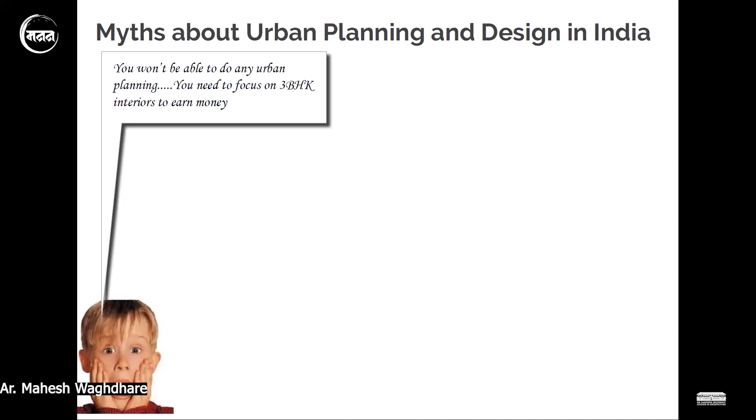Some of these myths started coming about immediately when we started formulating ourselves and figuring out how we would do urban planning. There were comments given to us like, you need to focus on 3 BHK interiors - that's how you'll earn money. You'll start off with 1 or 2 BHK interiors to at least get some money rolling. What is planning and urban design in India? It's like, when you grow and become something big, that's when you start it.

And then obviously I think I went through this the most. Sarfaraz and Mahesh were already married with kids, and I was already 30, and everybody was like, 'Don't start your business right now. Start it after you get married. Don't find business partners first, find a life partner first.' There was a lot of noise in our background when we were starting this. But our focus was always that we have nothing to lose, so why not start an urban design practice? We had to fight through a lot of this noise.

And then obviously when we do urban planning, there are a lot of big architects and names - a lot of credit to them - but how do you start if you want to do large scale planning? If you're not an established architect and don't have any connections, how will you start any kind of planning and urban design? People said there's no hope for you guys, you can't even get going. And obviously, you don't have any project experience under the firm's name. We had our individual resumes built over years, but you need to do some pro bono projects to build a portfolio.

We started off StudioPOD, and the first thing, fortunately, somehow we got a client who was looking at a particular site in Gurgaon, which was a very big master planning exercise for more than 1,000 acres. He was working with the government and wanted to put together a pitch he could show them. He had some wild ideas — why don't you put a golf course or some kind of high-end housing and an overall amazing master plan, and when can this be ready? We were very enthusiastic, a bunch of starters, and said we'll get this going tomorrow itself.

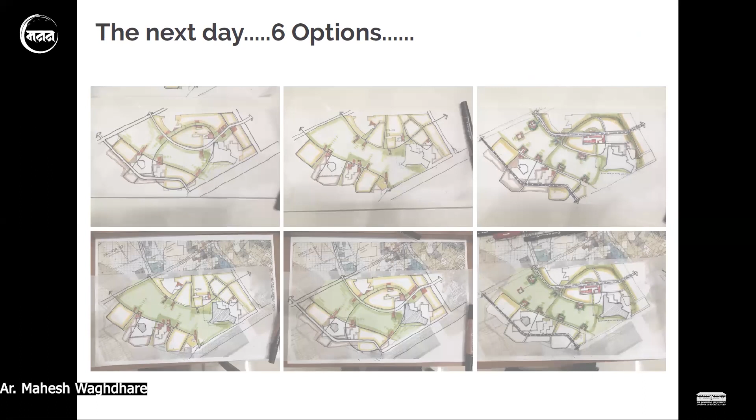So we went back to the drawing board, did our quick optioneering, and came back with these amazing sketches. We thought, oh wow, this is really cool, right? Then the client saw this and said, oh, this won't work here — this is very Western for us. We can't just come in and show these things and get these ideas. How would you kind of do that, right?

So we stepped back and thought amongst ourselves that we need to really not skip the process in the whole eagerness of doing these projects. We have to decipher our way of doing things, the Indian way of doing things. We have to look at whatever learnings we have and show that process. You cannot avoid that process and directly jump to the final thing — you have to show the process to the client also, whoever you're talking to.

It's not like a very highly technical thing — it's about taking them on board with communication of how you do these things. And again, using the knowledge over whatever 7, 8, or 10 years of experience we've had, it's about how well you communicate, whether oral or graphic, your ideas to whoever you're explaining to.

So this is what we really understood in the beginning itself — that you need to look at relevant solutions from our perspective, our context. We cannot go and jump to something where anybody would say, oh, this is not coming from the ground, from the context itself. We always find this very fascinating.

This is an award-winning NID product by Vikram Panchal, which is basically something as simple as what a construction worker would use to carry bricks and construction stuff around. How could you simplify something as simple as this and put it in context for anything you do in terms of design and planning.

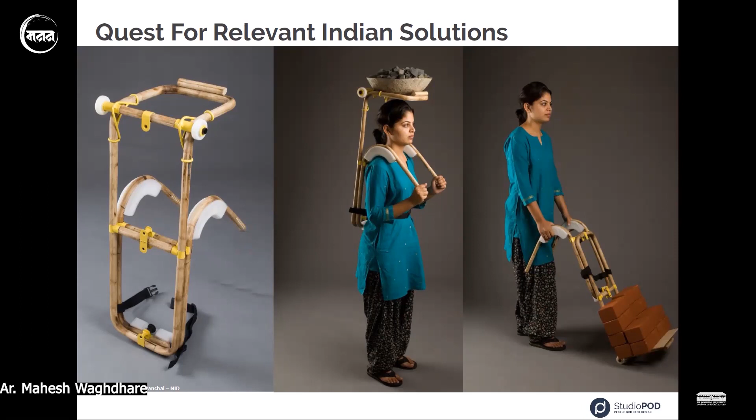So we retreated and went back amongst ourselves and said that we'll follow the process, let's not jump it. We have to look at the overall thing, whatever the project scale is, big or small. We have to plan for resiliency into our projects, for sustainability in the longer term — whether it's environmental, ecological, or economical, all of those parts. We have to plan for resiliency.

Connect efficiency is about transportation, infrastructure, and human scale, which is very important when we look at these large-scale projects, and even in architecture projects. We always get lost in the design idea of what a building is, but then what does human scale really mean? And when you do large plans, you have to phase out and invest at the right time, at the right place, and in the right part of the project.

At the end of it, all of it has to be done together with larger teams. Even in architecture projects, we have not only the architecture designer, but an array of consultants, technical experts, and structural engineers to come up with the whole idea and execute it. At the planning level, it becomes much bigger — you have stakeholders who are not in the discipline, you have to talk to politicians, you have to talk to all kinds of people to come up with a particular strategy that would work.

So we went back and just reiterated some of these. And what we'll show right now is some of the work we are doing and the learnings from each of these that we are looking at.

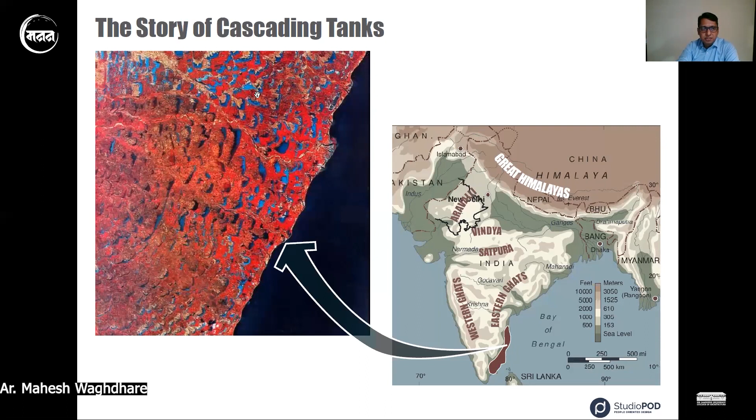This is basically the eastern part of India, towards the Bay of Bengal, the Eastern Ghats going towards the Bay of Bengal. This is Tamil Nadu and larger South India as such. There are more than 300,000 tanks connecting each other towards the Bay of Bengal. We obviously have all these river systems connecting to the Bay of Bengal in this part, and all of these tanks were man-made, some dating back to 300 BC.

It was a very interesting, intricate network of water bodies that used to connect to each other and over a period of time connect to the river itself. The idea was when the monsoons happen, the rivers are not all perennial - they have water at that time, but they give water to these tanks, and this is where the storage system used to be built up.

It was very well managed - 2 to 3 villages used to manage one particular tank, and everything was quite decentralized. So the entire water utilization and taking care of the water was very decentralized. Everybody used to take care of the water bodies for drinking purposes, for farming, and everything else - two different tanks were used. It was a very sustainable, self-contained system.

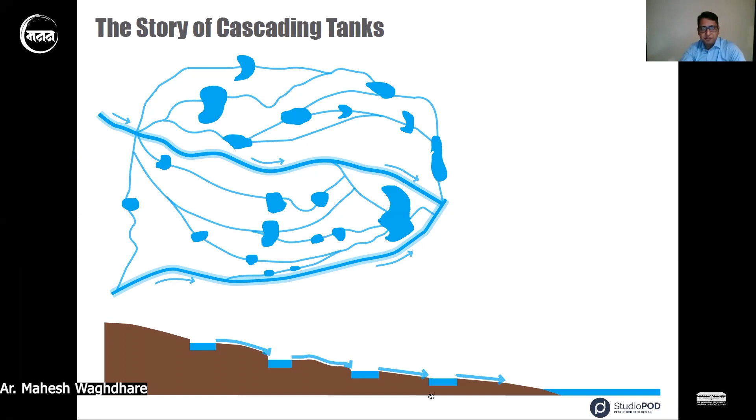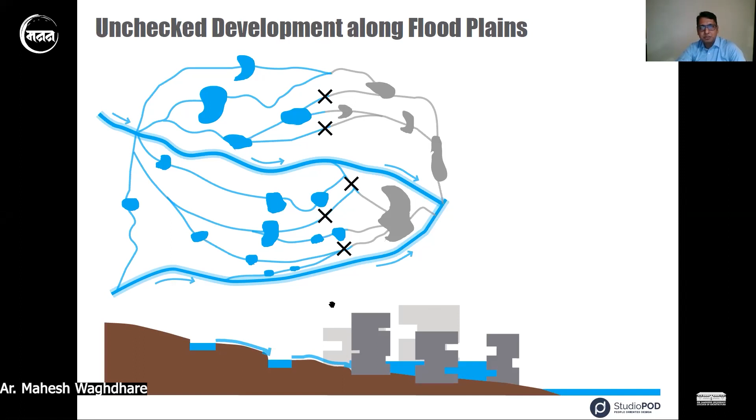There was a lot of loss of life and businesses and all kinds of big impact. It was a very big realization that we are having recently.

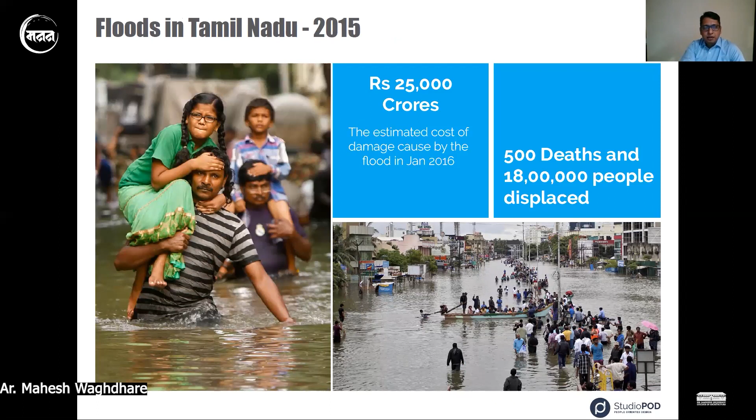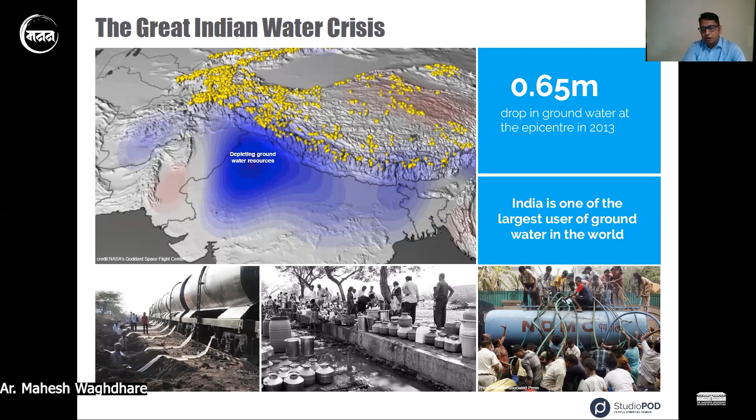So there are 2 different polarizing conditions of how water is creating havoc in some places, while at other places there's no water. So in terms of when we're using this kind of information, how do we look at it when we have large-scale projects in planning?

This is one of the projects we're working on currently in Pune - a large township development in Kharadi. This circle marks the site. But when we look at this whole development, it's a larger ecosystem which is prevailing, which is again part of the whole ravine ecological system - the water bodies, the greens, how the entire connection at a larger scale is happening to this particular place.

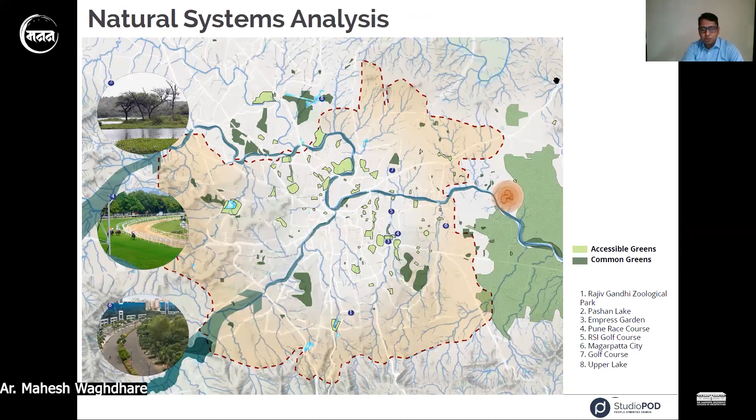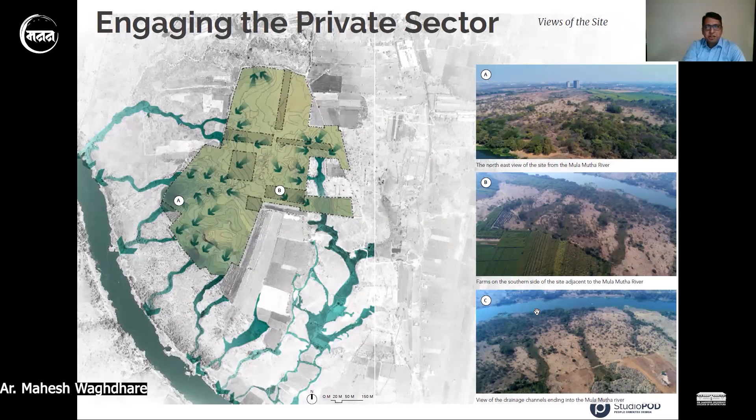When we looked at it much more carefully, we could see that the entire topography was well established, and towards the river these small little ravines and rivulets formed on the side, shaping the topography and reaching the river itself. Amazing views if you see these aerial drones, these green paths leading to the river. So when we did the whole master plan, we made sure these rivers and ravine areas, these small streams, were maintained and enhanced on site itself. And if you look at any master plan, the open spaces are always central to the whole plan.

We made a plan that was ecologically resilient, with an open-ended plan where development was not central to the open space. It was more towards the river on both sides, with development going around it. So we created a whole heart of a complex, but the open spaces always respected the current topography and ecology of the site.

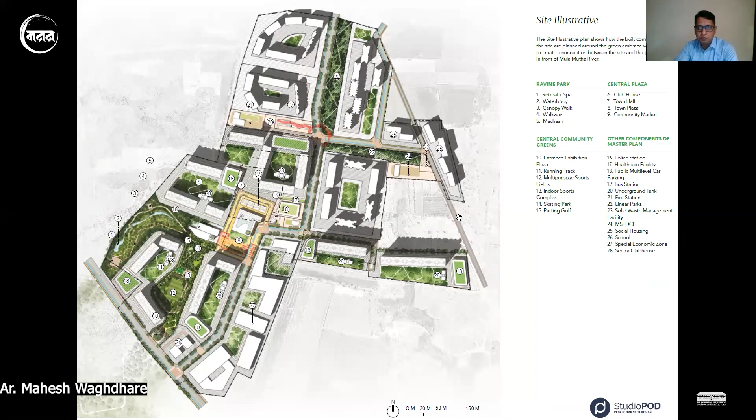Then there are the layers of storm water, treated water, how grey water is reused on site, and the strategy of water collection. We've been doing this over the years, as in India there was a sensitivity towards water and the culture of water itself. But we need to respect the current topography and look at water strategies accordingly.

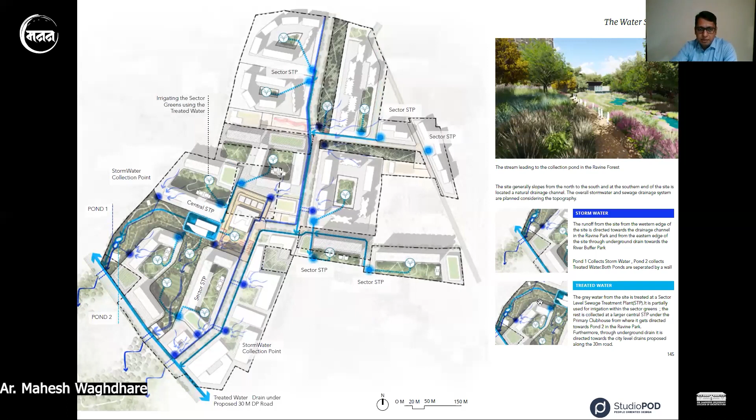So this is one of the projects with a very different approach. We're also doing the whole landscape in this ravine system, implementing this entire large landscape right now. The idea was retaining the ravine system, allowing the streamlets to flow through it, with a nice canopy walk that respects nature. It's not over the board in terms of ornamental landscape, but really looking at the ecological part of the landscape itself.

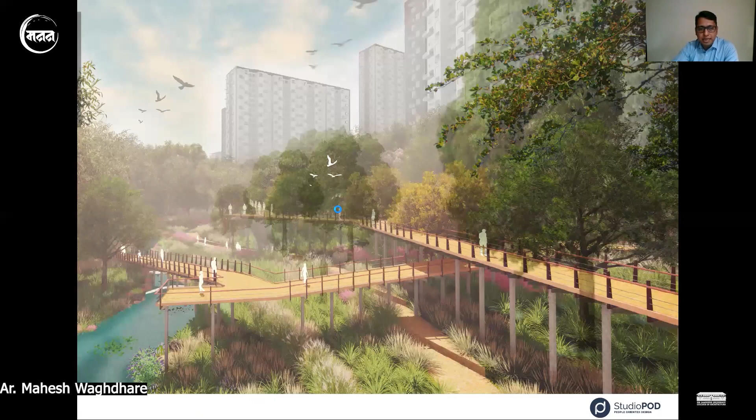This is under construction right now, and the idea was to create this whole 10 acres of self-sustaining forest within a private development, which is a larger township, a public-private kind of thing. So something which is evolving as a project itself.

At the same time, we're also working in other areas, and this is in Abu Dhabi, where we worked with CBT architects. It was an international competition we won against AECOM and very large companies like Surbana and others. The idea was to create a water story for a totally different context, hot and humid climate in Abu Dhabi. A larger part of it is desert itself, and how sea level rise impacts it, and how you look at the entire edge condition of the water.

This is almost like a 10,000 acre island, which is a third of the city of Abu Dhabi itself. The entire strategy was to look at it from an ecological perspective, how you look at the edge from a resiliency perspective for sea level rise of 1 to 3 meters in the future, and create a whole system that allows water to come in and out of the site.

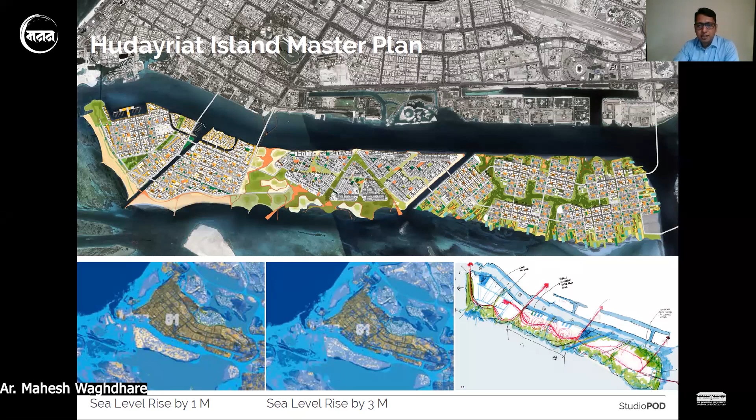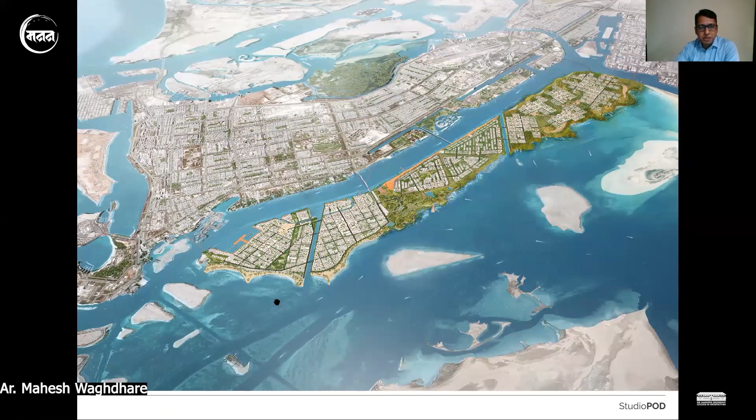The competition winning entry has reached a different stage now. A part of this island is already opened up for citizens, and Abu Dhabi is a different world altogether in terms of the pace of a project. So the idea is that a lot of these systems, you have to think differently. It cannot be a copy-paste solution that works in one context and is just applied in another. We work in different contexts where different things happen, and you have to adapt to it.

One major chunk of this was also this large open space. This team had a very big consortium of 8 to 9 specialist consultants. One was a transportation consultant who talked with us about how to position the open space. He suggested that instead of having it on the northern side of the island as originally planned, we move it closer to a particular access point, which would become a larger city amenity itself. So the idea is that ideas coming from different places merge together and become one thing.

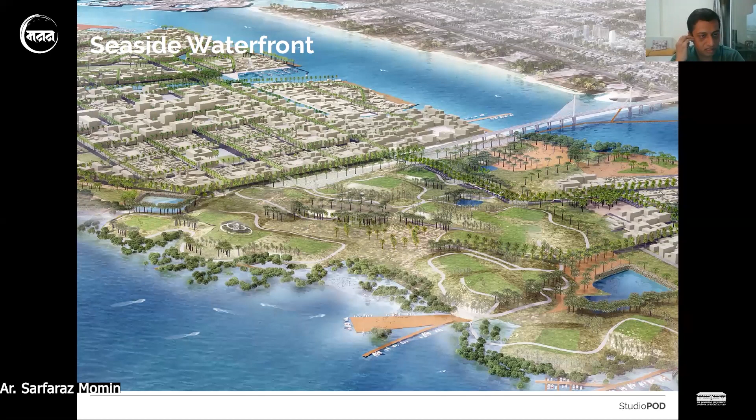So we have to come up with different strategies depending on what the context is, right? Similarly, one of the biggest mantras that we stick by, a very important mantra for us, is connect efficiently.

So we always show this picture. This is how we discovered that we can communicate with a lot of clients in India when we talk about history, what used to be there, what was good about it, and how we can adapt that and make it more 21st century. We show them this picture of Chandni Chowk, where you had room for everyone - Hathi, Ghoda, Palki, people, everyone had room on our streets.

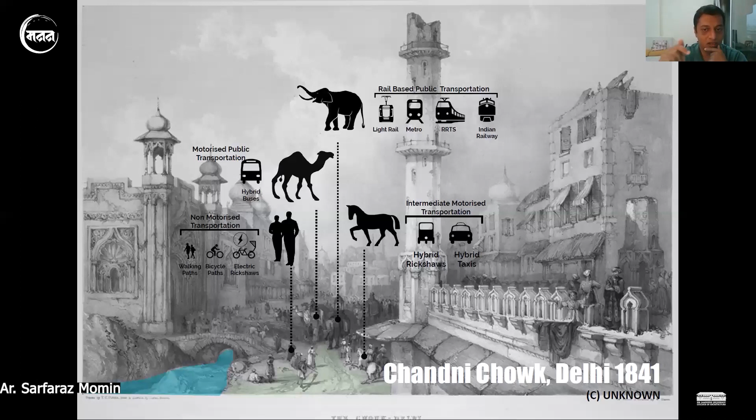If you were to design streets like this in the 21st century, you will have to create room for all the different modes that are available. However, unfortunately, currently our cities are only building for one mode of transportation, which is the car. And that has to change, because this is not a sustainable mode at all. If we grow at the pace we are growing, we'll have to increase our road capacity almost 6 times to accommodate these cars on our existing roads.

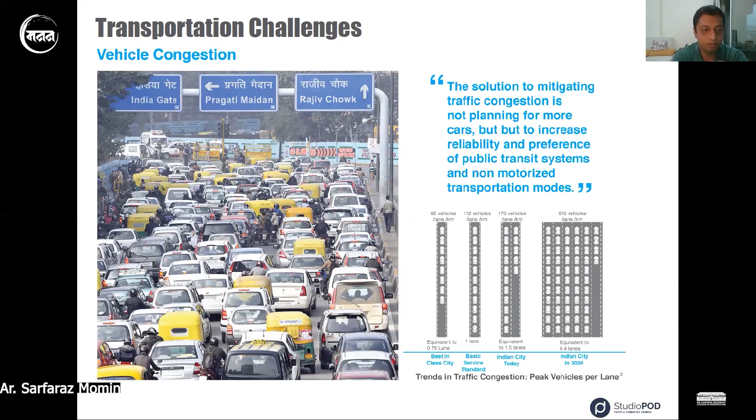And it's not going to stop there - demand is always going to increase. There are no cities in the world that can actually provide enough road for cars. There will always be problems that arise.

So the biggest mantra is to change the whole paradigm. The paradigm is that we design cities for people, not for cars, where people come first. You want to move people, not move cars. And then you deprioritize other areas, and make sure everyone has room on our streets.

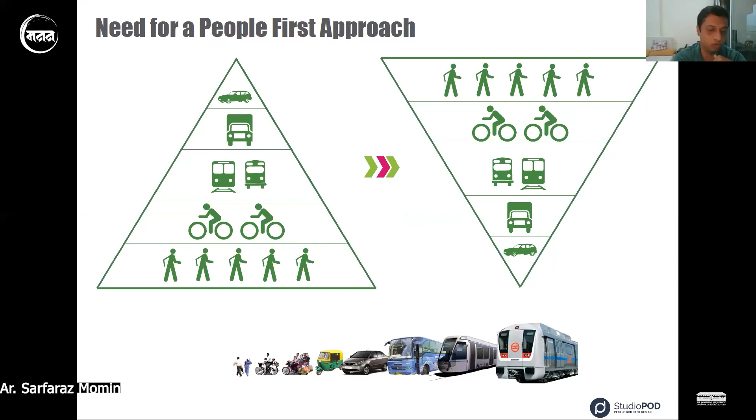So what we do, as shown on the top left-hand side, is we demonstrated this on one of the wide streets in Gurgaon. It's like free for all - there is absolutely no room. It's like putting a little goat and a tiger in the same cage - who do you think will win, right? So in this case, the cars are the dominant species who will dominate the entire area if you give them that space.

What we need to do is create safe spaces for all different modes to exist. Hathi, Ghoda, Palki - how will we get them back on our street? We have to make room for people to walk, cycle, vend on our sites, have public transportation, ensure equal access to all sorts of people, and make room for all of them on our streets. So this was a version of a 60-meter right-of-way - a 60-meter right-of-way available in Gurgaon, shown on the top left side, converted into this. We have room for open spaces, trees, birds, room for everyone on these streets.

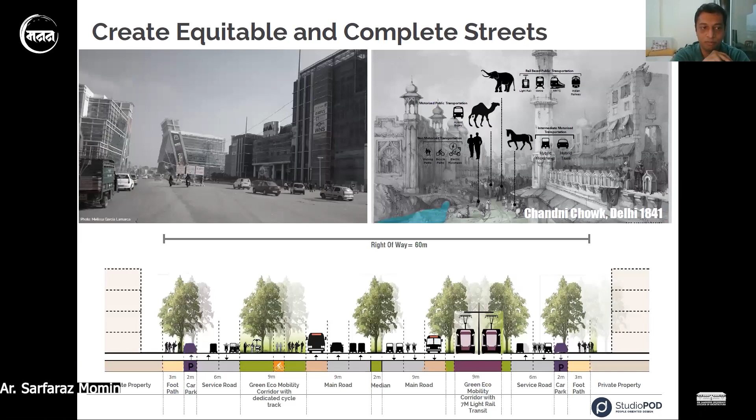And streets suddenly then become public spaces, correct? That's the idea - one of the biggest assets we can have is to convert our streets from being just transport corridors to also being public spaces.

And the one mode that they could think of was cars. So they said, oh, we need to increase the capacity of our roads - that's it. They came with this agenda that we want to build a highway all along Dal Lake.

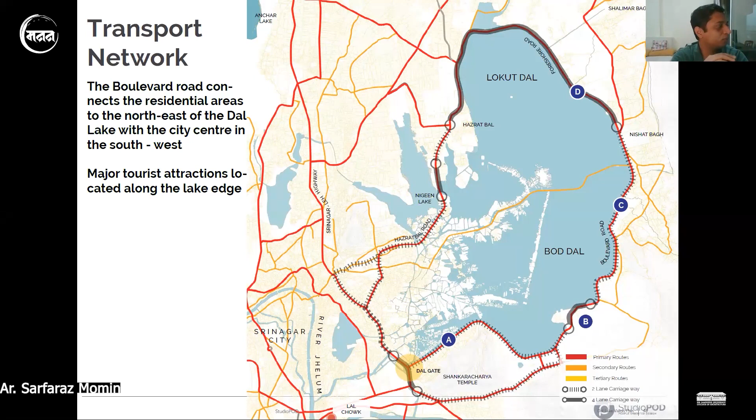So what we had to do is go back to the drawing board and understand what the problem was.

So what we wanted to do is connect Nishat, Shalimar Bagh and all these areas to Dal Gate, and also Lal Chowk ahead, because Lal Chowk is the economic generator of the area. And to do that, what are the possibilities that can happen?

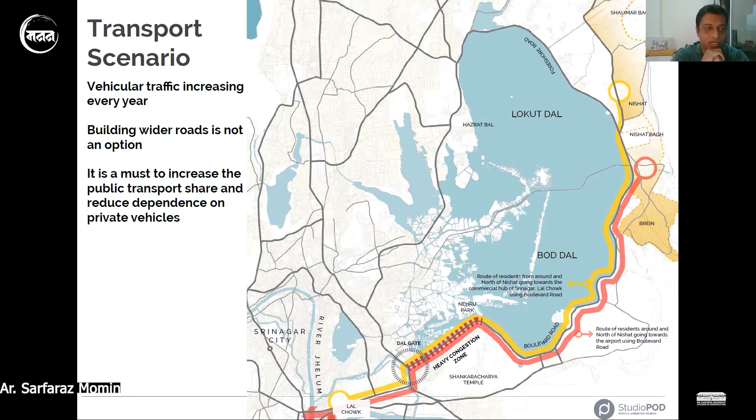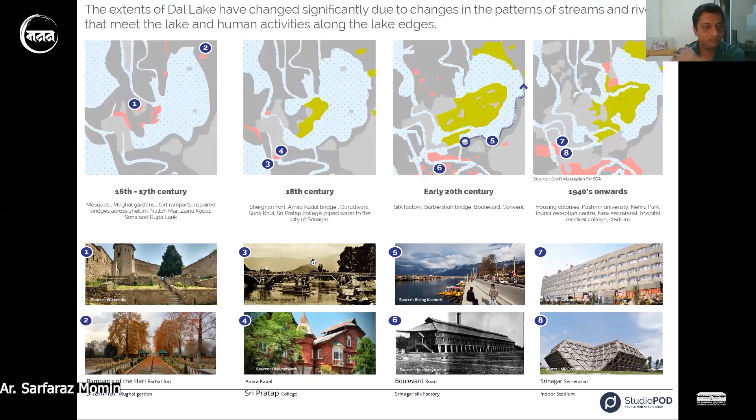And we discovered on the way that a lot of people used to commute using the lake itself. It's a cultural thing that actually was prevalent - the shikara story, right? It used to be something of a Venice of the East sort of situation where people used to commute using shikaras.

Dal Lake actually has an important ecological connection with the surrounding hills, so you have all these waters and streams that empty into Dal. That's what makes Dal a collection bowl.

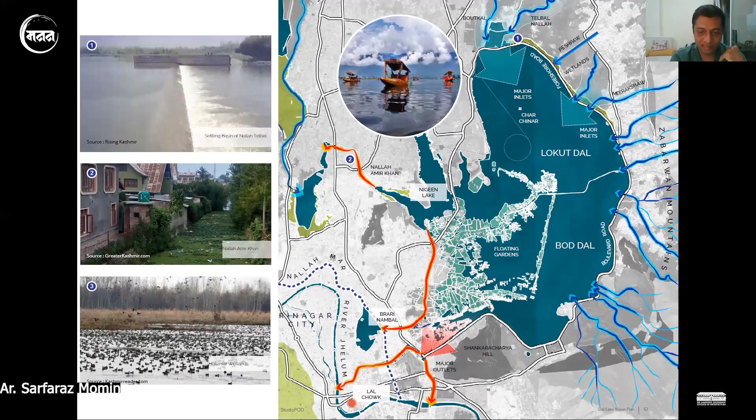The challenge we posed was that if you build a massive highway all along the coast, you'll actually destroy these natural systems in a big way. So we showed them an alternative, which was introducing public transport with around 40 buses per hour capacity, so you don't have to reclaim any more of the lake for constructing roads, but can actually create really high quality open spaces along it and revive the old culture of boating through the area.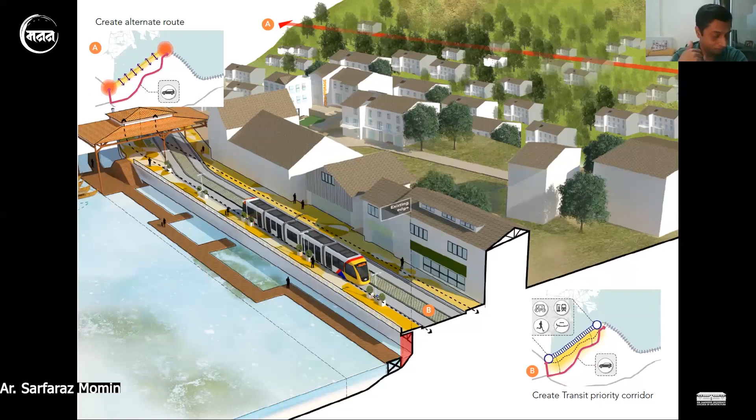We worked with Ola, and they expressed interest in actually starting boats all along Dal, and it is something that is going to be the future. This is a sustainable mode which we've done for centuries, probably something that we can work on.

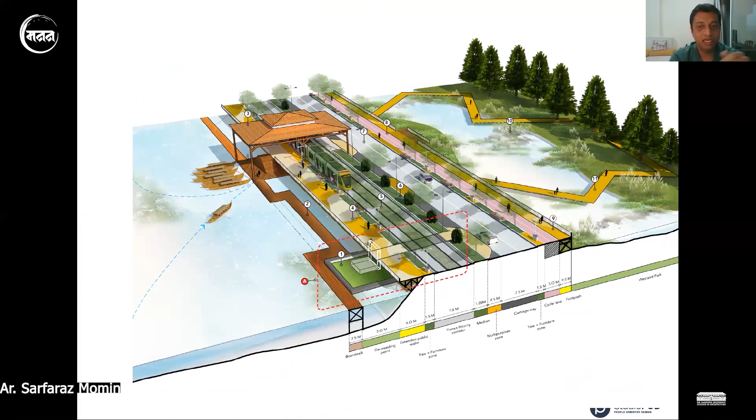And we showed them a vision that you convert these areas that are about transportation. You take different approaches - use water transport, revive it, to actually construct high quality public transit, and then build these networks of cycling and walking that would actually make transportation easy.

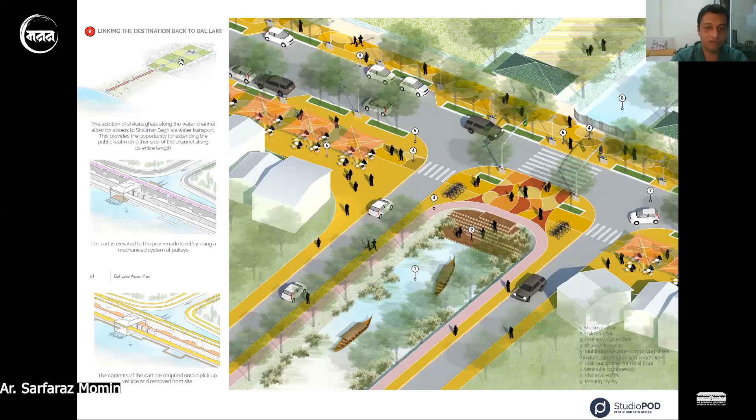Similarly, Shalimar Bagh, which has lost its connection with Dal Lake, we presented ideas of how we can revive it and connect it back to the lake through urban regeneration. And this was extremely well received.

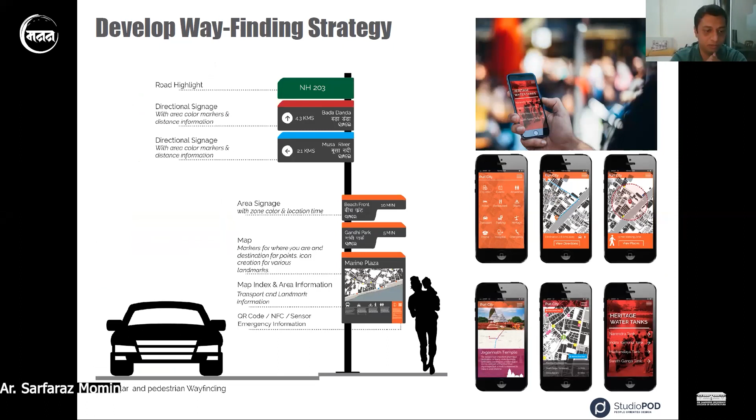So what happened was there was a big change. And obviously you make this entire system very smart - you have to bring 21st century ideas to the table of how people will commute, how people will now relate to it. The idea was, how do we move people instead of only cars?

And this project was extremely successful. They were developing the ghats to actually revive the whole boat network within the lake, and the massive reclamation of Dal Lake itself was then stopped as a project, because they saw the value in the alternate proposal - working with our nature and working with our context in that manner.

And then we always have this third mantra - always have intelligent infrastructure. Let's plan for intelligent infrastructure.

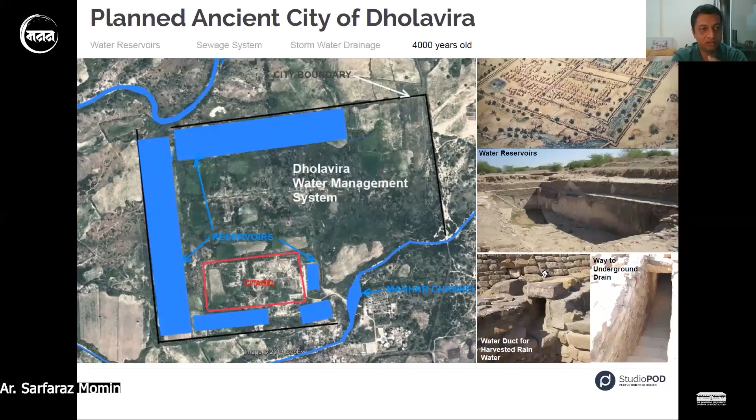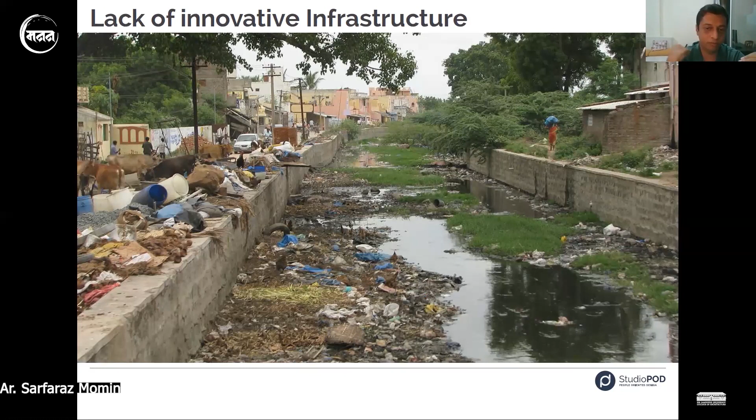So this was a plan that we worked with the city of Naya Raipur. The city of Naya Raipur wanted to develop a master plan for the entire urban drainage of the city.

So we went ahead, go next, keep going fast.

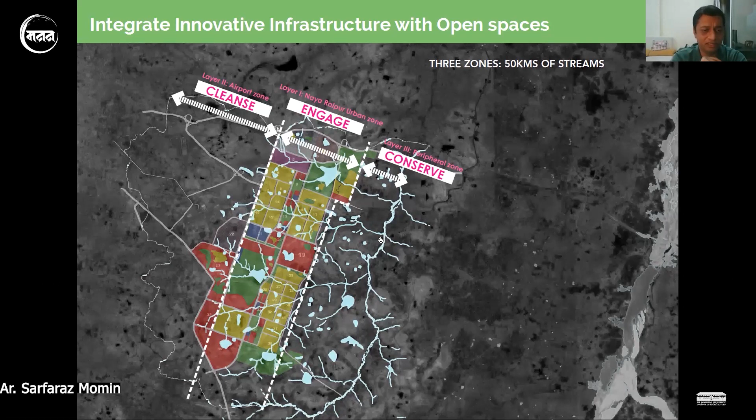We developed it based on a sustainable urban drainage system. These are the streams on site, you can see what they're like. We divided the entire city into three zones: one near the airport, then the city, and then afterwards.

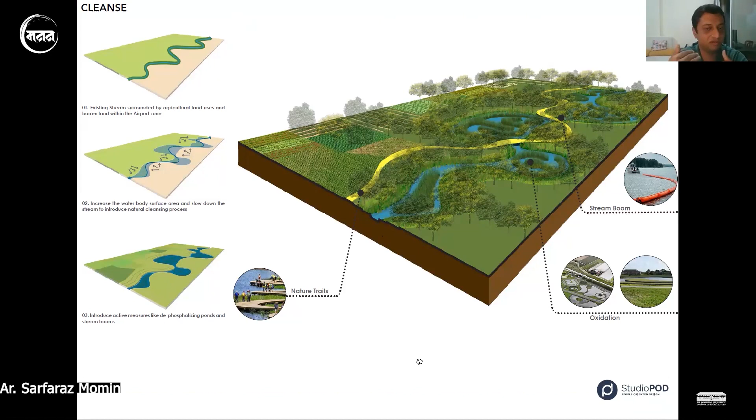What we want to do is slow down all the water that comes, and make sure there is enough plantation and natural vegetation that would clean it as a natural process, and make it accessible to people.

Then when the stream goes through the city, you make it more interactive. It could become a social hub. So the streets are the fronts, and now the canals will actually become the fronts of the entire city, with public spaces and amenities on the canal.

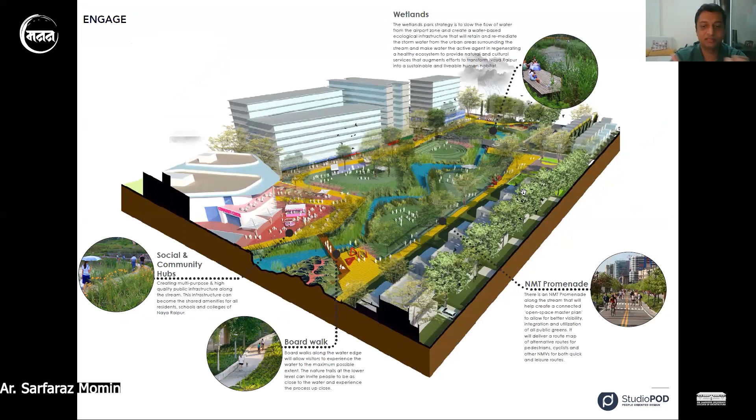And then afterwards, when the water leaves the city and goes towards the river, you conserve the land by complementing the agriculture happening outside the city, providing aquaculture and other areas, conserving and preserving the landscape of the entire area.

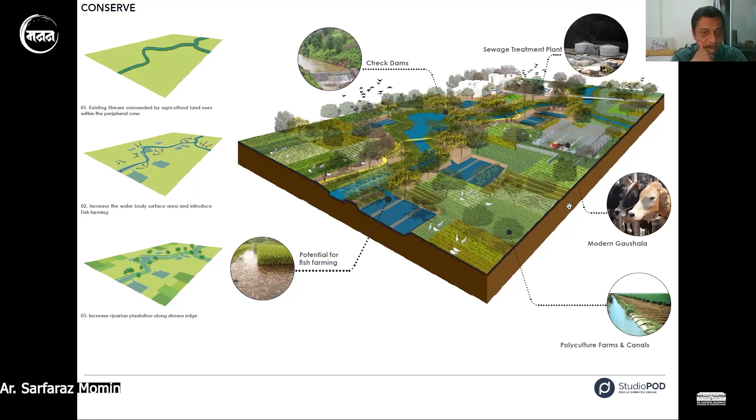So we came up with this plan where we developed a whole network of a stormwater system. This is working with an engineering firm on the stormwater network, then converting it into a landscape project, and eventually it became an urban design project, because now this also provides alternative transport connectivity through the entire city—now you can cycle from one area to the other.

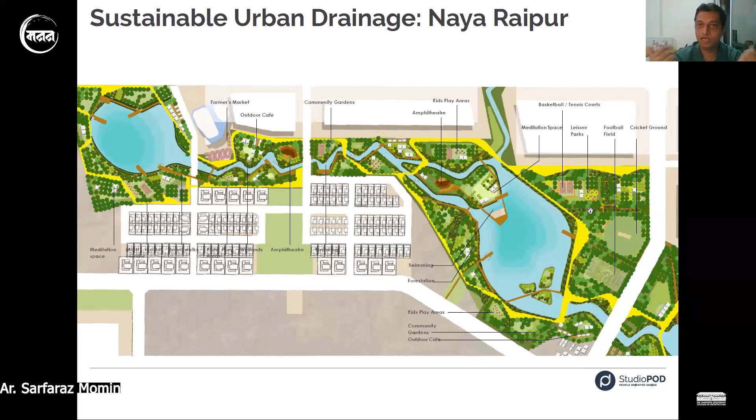On the way, you can have coffee at the social hubs, or stop and meet people. Suddenly the backyard, which used to be the nala, has now become the front yard. While doing this, we're conserving water and making sure it's this 21st century city that is water self-sufficient and has all the livability factors that make it attractive for people to come and live here.

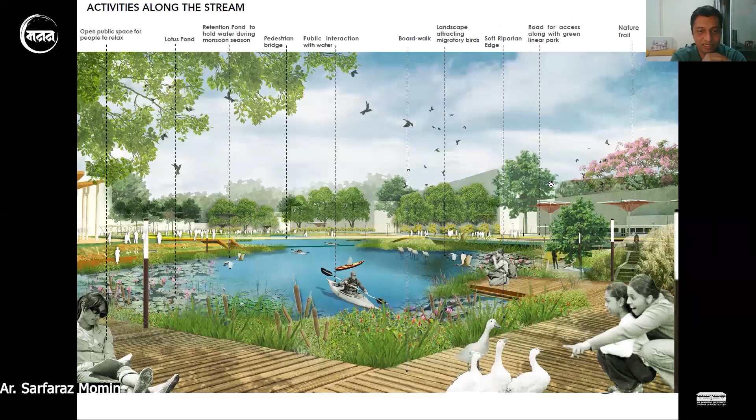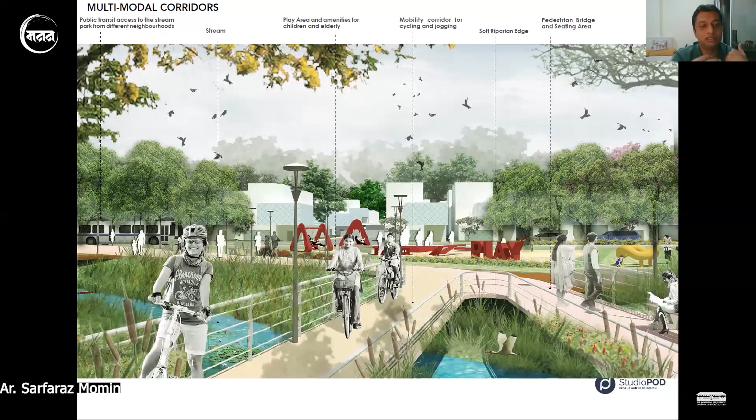So we presented this vision to them, saying it's not about putting concrete along our rivers anymore—it's about making sure they're green, making sure the ecology survives, making sure it's a biodiversity corridor that will enrich the entire city.

So again, we demonstrated in a 2.5 kilometer stream length that we could create this massive asset for the entire site, a 62-acre public forest area with streams, play areas, and amazing open spaces that would make the city even more livable.

Now I'd like Mansi to take up a couple more of these. Thanks. So one of the questions that comes to us as urban designers, and one of our core principles, is keeping true to the human scale. That means you don't really worry about how the building looks, but about how the building feels and what kind of environment and social interactions it can provide.

We had a client who came to us and said they wanted to challenge the way universities are made in India, because a lot of them follow very modern, intimidating architecture. They wanted to create a training center based on the scale of villages, where a person does not feel overpowered by the architecture, but allows for spaces.

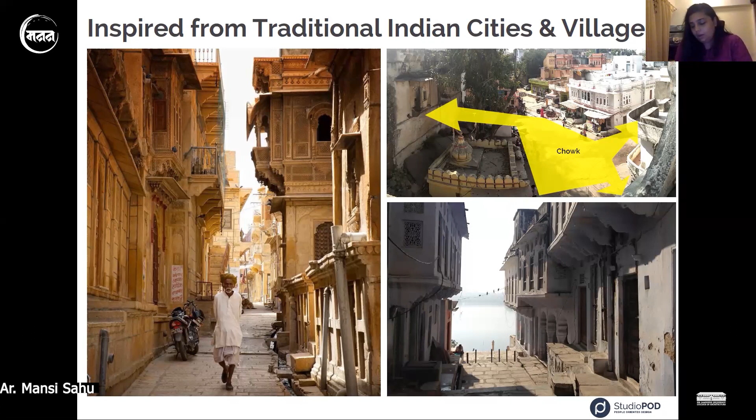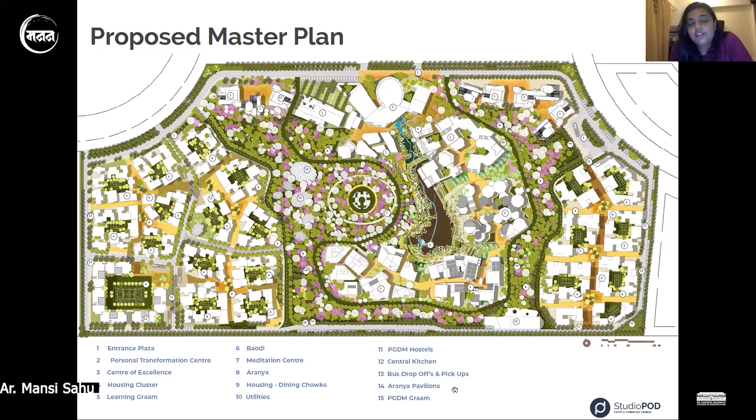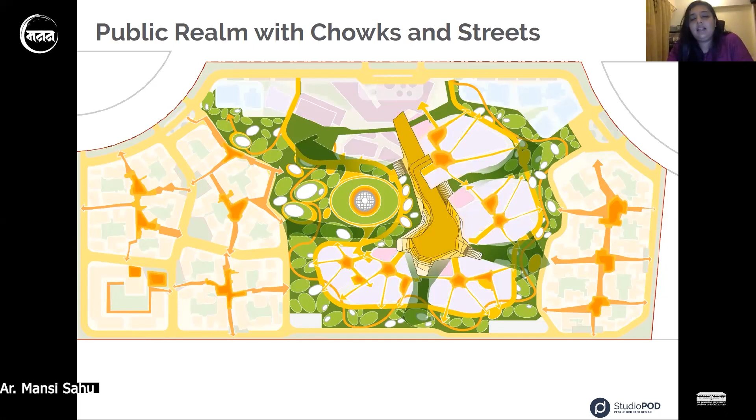We had to explain that this was because it was based in Jaipur, and the whole reason was to create streets, chowks, and an aranya of sorts that became the open space. We had a central area we called the Baodi, because the way the water was flowing, everything flowed inside it—instead of a normal amphitheater, the Baodi became the community space that changed with seasons. The chowks became the large halls where people would sit.

Also, the training university was for adults, not for young people—it was for people already in their 40s and 50s. So it was about having spaces for interaction.

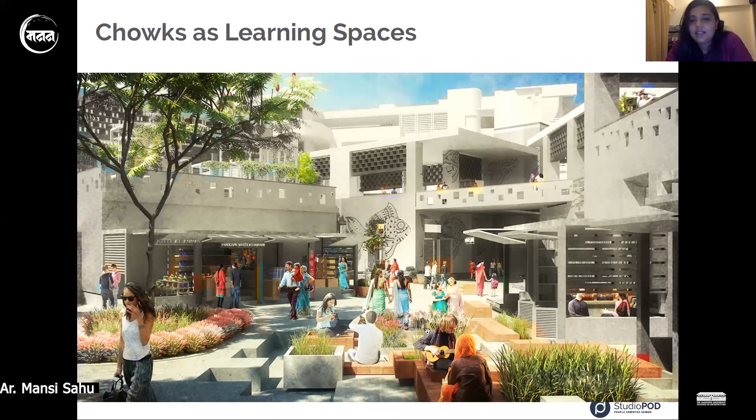We also created the idea of street inside a campus by creating these little kiosks called dukans, which would be learning dukans for different NGOs that would come and have different seminars or things that are keep going on. It becomes an avenue for that.

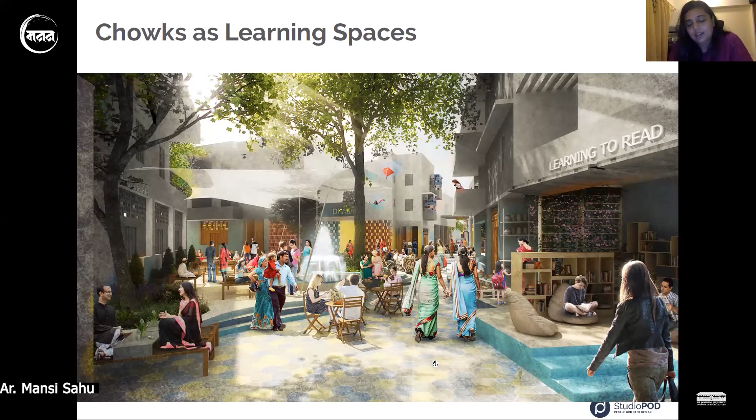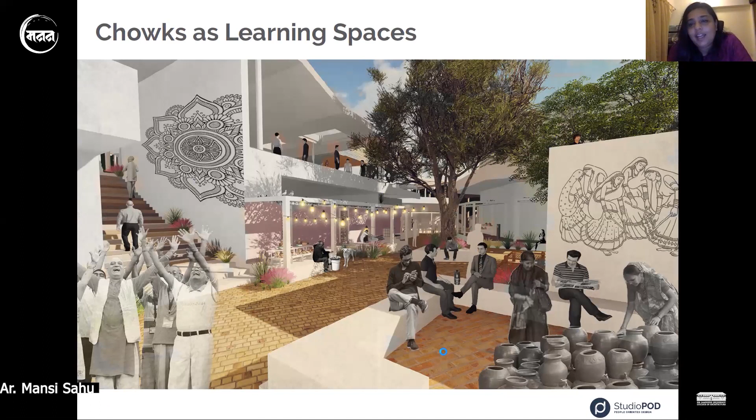And we had different kinds of chowks, which are learning chowks for different facilities. We had dining chowks instead of a dining hall where people were eating in khatiyas. We had chai chowks, right outside each cluster of classrooms, where everybody would come back for a break of chai and conversation.

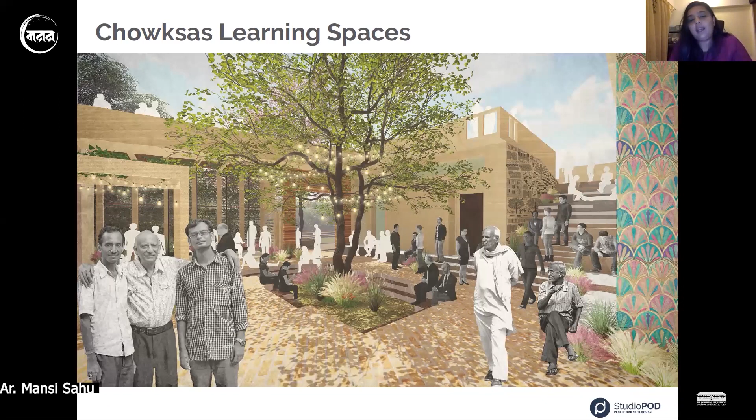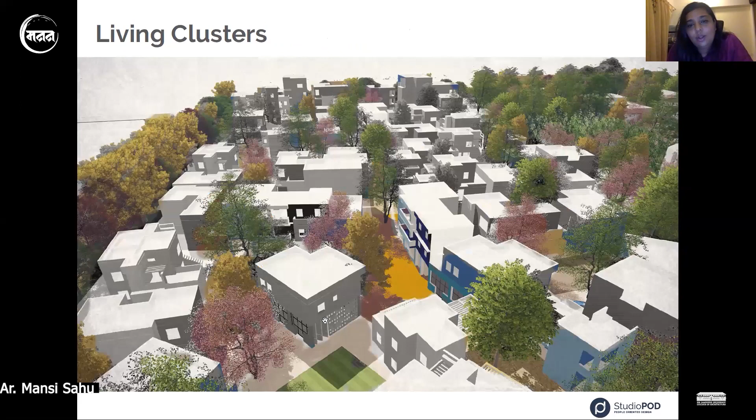And then obviously we had to take the same language into the living and the hostel camp area also. So the hostel was also designed taking inspiration from a lot of Rajasthan villages on how they are so close to each other. They are high density, low rise architecture, sort of clusters. And when you go in, the gullies sort of take you to different places.

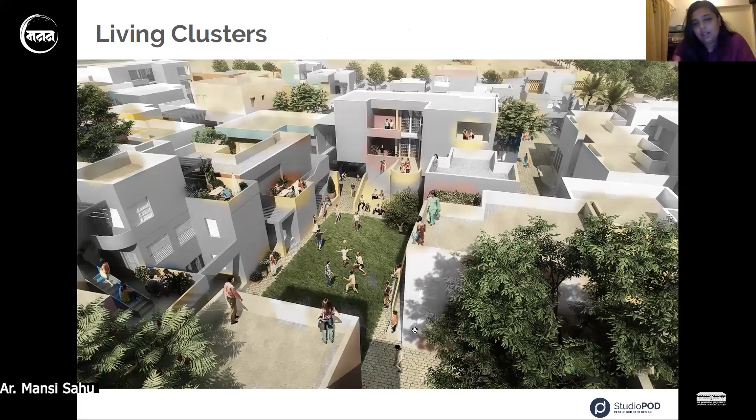As a cluster, everybody was coming here in a training batch of 40, just like I guess your each batch would be of 40 or 50 people. So each of these housing clusters were designed for a batch of 40, so that when you would come to train with a batch of 40, you would also live with them. This is where you have informal conversations and a chat. And the thing that connects you again is this main street, which again, as a program of the university, would come alive with different sorts of activities.

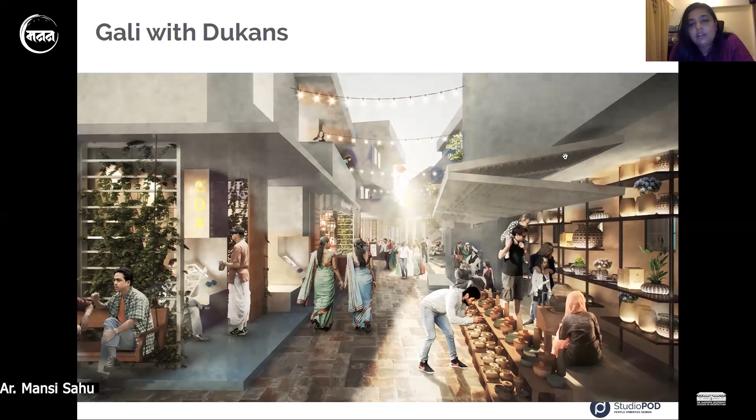I love this view because this is what the idea was. If you see on the left hand side, there's this man in a dhoti wearing VR glasses, and that's what this was for. It was a campus for training the teachers of municipal schools of the villages all over India. We had to upgrade the training so they can become better teachers and principals, and also create that sense of education amongst the kids.

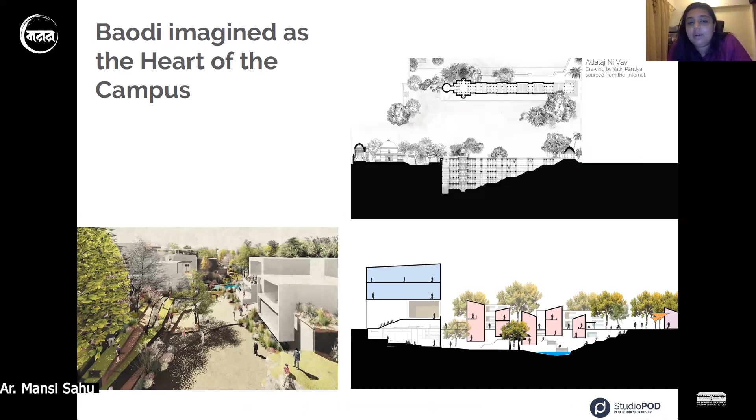The section of the Baodi was inspired by an actual Baodi, but instead of making a normal amphitheater, we had buildings going in. The Baodi was meant to be something that changes season. Whenever it would rain, it would become the area for collection of water. Whenever you would have a large convocation ceremony or something, this would be the space where everybody would come. Or on an evening, if you want to have a one-on-one conversation, this is where you go. Because it was so large, you could have different clusters of people going inside. So we called it the Seasons of Baodi.

And that one open space, instead of being like a lawn or a large area which would be hot, we made it more recessed, more shaded, something that collected water, and it became more livable as a space.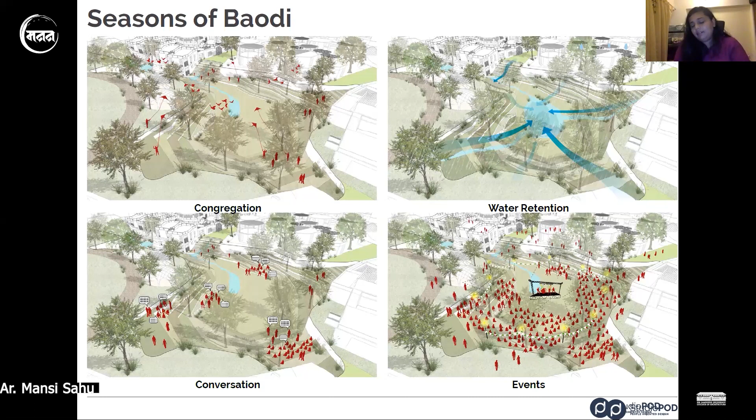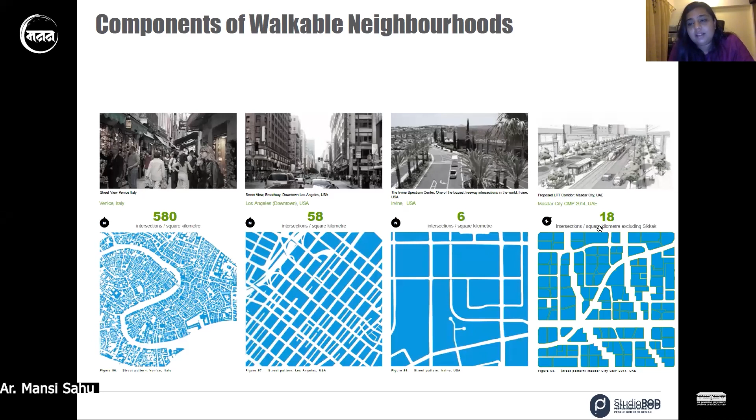So when we were doing a project in Abu Dhabi for Masdar City with CBT Architects, this was a question we raised, where the plot sizes were already very big. What we wanted to do was create these sikkas - like gullies in Arabic, shared streets just for pedestrians. We wanted to break the plots into smaller plots, and also have smaller courtyards and clusters.

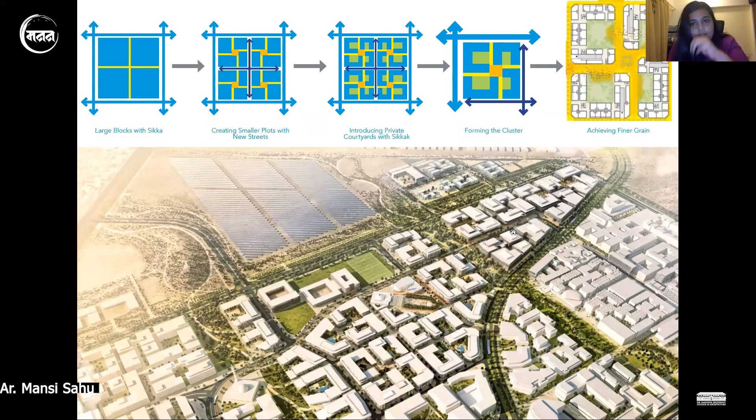By doing that, we started having spaces like this that were part of a larger parcel, but allowed people to freely walk through and know each other. It was also safer because if something were to happen, you had enough people looking into these areas, and a lot of children could know each other, and a lot of community could happen.

So these are some strategies we use as part of human-centric design, where you actually think about putting yourself in a space - not just as a human, but sometimes as a woman - and ask, is this space going to be safe for me at 11 o'clock at night, or will I leave a child on their own, or will I have to hold the child's hand? Those are the questions we often ask ourselves for different kinds of projects.

Just to add to this, the plan was for phase 2 of Masdar that won the AIA Urban Design award.

Masdar hired the same consortium again in 2017, and we did another phase, phase 4. That also won an award for AIA Excellence in 2018. I'm really proud of these 2 projects, mainly because the team was fantastic.

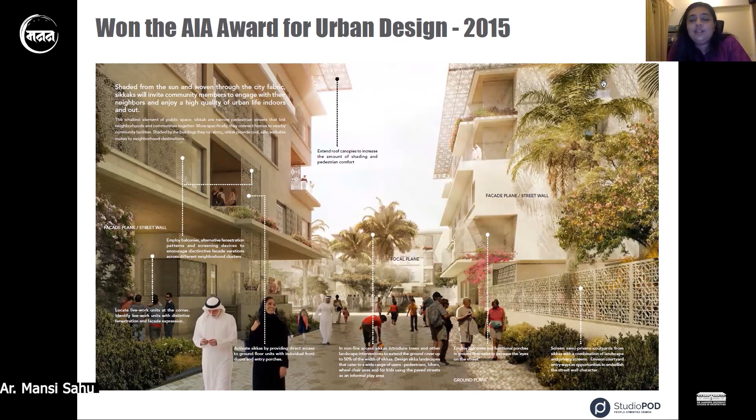The Ganges has its own mind, it decides to go from one side to the other, and that space allows that to happen. So when we talk about investing strategically, we're talking about how do you build, where do you build if you're doing a project, and where do you not build. A lot of the time, as urban designers, we have to put our fingers down and say do not build here, or do not pour concrete here, this is a living system that exists, so do not disturb it.

We were working on a project in Amaravati, in Vijayawada, for 7 islands, and one of the islands the tourism department wanted us to work on was called Bhavani Island. If you go to Vijayawada, you can take a boat there.

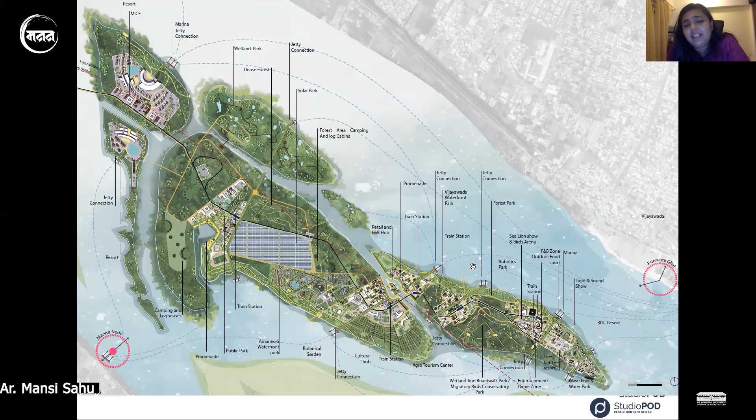One of the main things we had to do while designing this island was to let the river be, because these are river islands, we wanted the edges to be floodable. We did not want to ever define the edge, because even when we started working, it was so difficult to get an actual boundary of the river, since it kept changing every time the survey was done. So we designed actual edges that allow flooding to happen, which allows sedimentation to happen, and landscapes very similar to what naturally exists.

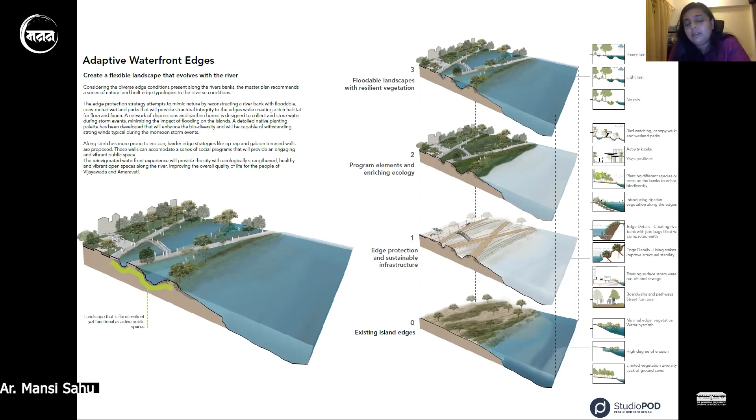Also, in the center, we had a strategy for how to create a mobility corridor. So you still allow people to program it, but you don't build and destroy the natural way the river moves.

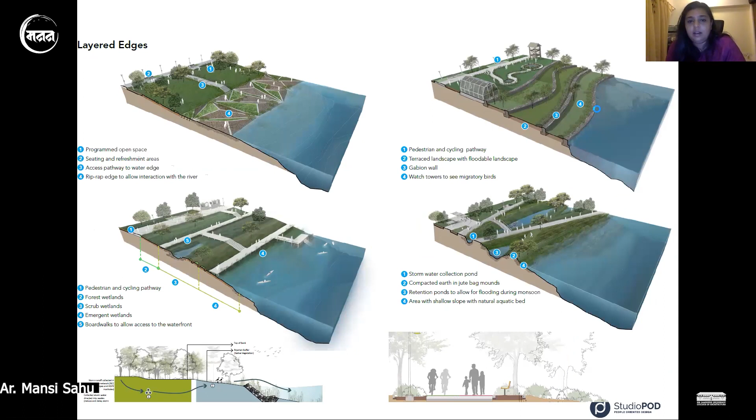We had to fight a lot, but we made a case against building a golf course here. Instead, we were able to convince them to create a natural forest or wetland park that would allow for things to happen.